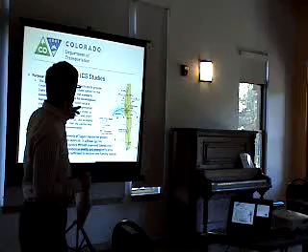You can see the purpose up there. I won't read all of it, but I'll emphasize the italicized part: you'd only build a high-speed transit system if it delivers social, environmental, and economic benefits that are greater than the cost of building it and operating it.

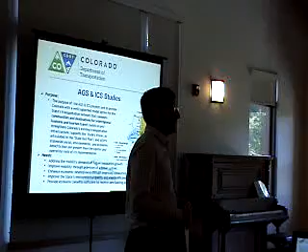The needs at the bottom are your good planning things. We're going to have growth, we need to have economic development, and we need to improve mobility and offer choices.

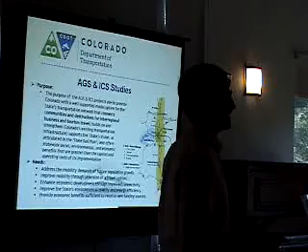So what does that mean to each of you? What are we talking about in terms of growth? By 2040, Colorado, today at 5 million people, will go to 8 million people. The Front Range alone will add 2 million people. The I-70 corridor between the west edge of Denver and Eagle County Regional Airport will add almost 250,000 permanent residents. So when we talk about what the state might look like, those are the kinds of things we have to look for to provide a transportation system that takes us into the future.

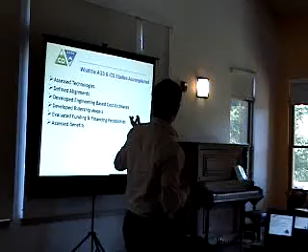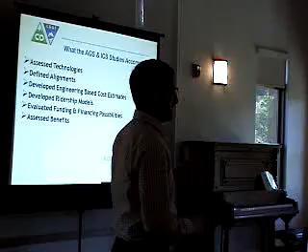What did the two studies look at? We looked at a lot of technologies, a lot of alignments, and developed engineering-based cost estimates. As the Rocky Mountain Rail Authority study had done, we took it one step further and costed things out on a per-mile basis, whether on structure, on grade, or below grade, to that level of detail so we have better confidence in the cost.

We confirmed the findings that Diane mentioned, that the two systems have to work together. If you do one or the other by itself, the benefits just aren't as great. And then we evaluated funding and financing possibilities, which I'll leave for us to discuss a little bit more later. Bottom line: the benefits outweighed the costs.

High-speed transit delivers more choice for people making longer distance trips. Speed makes a huge difference.

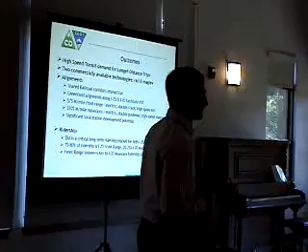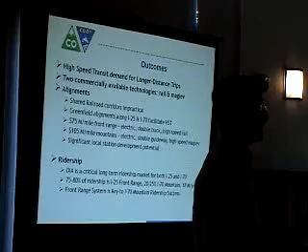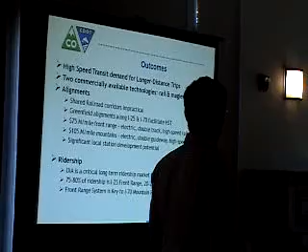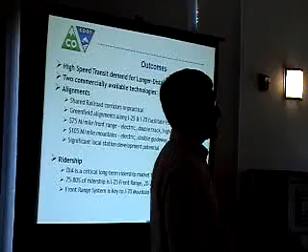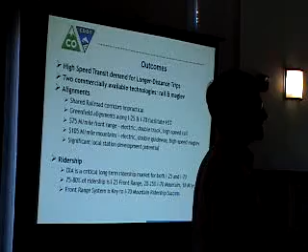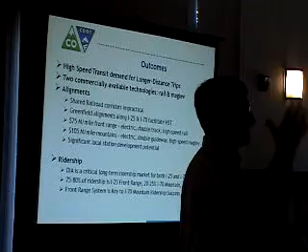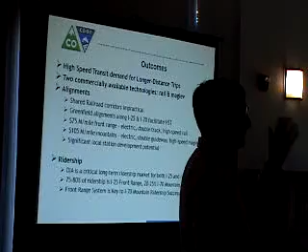Alignment-wise, folks say, why don't you just buy some used train stock and throw it on the existing tracks? Colorado, compared to many other parts of the country where you hear those kinds of stories, just doesn't have the infrastructure. Our freight railroads are maxed out, particularly with the growth of oil and gas development on the Front Range and up in this area, there isn't any spare capacity. There's not abandoned railroads like you find in the upper Midwest and over to New England where industry has left a lot of choices for a lot of people.

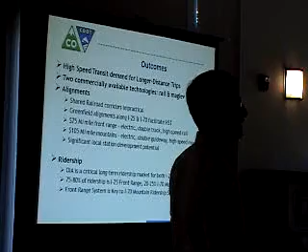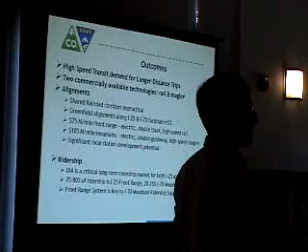Cost-wise, the numbers are big. They might look staggering, but when you look at the cost of building interstate highways and expanding those in urban areas, or expanding them along the I-70 corridor, the costs are nearly identical.

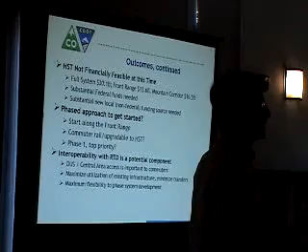I can touch on ridership, but I'm going to keep us moving along here. High-speed transit with current funding sources is not feasible without some new funding source. You saw the cost on the previous slide. Substantial federal funds will be needed to make this work, and non-federal sources are also needed to provide the match to the federal funds.

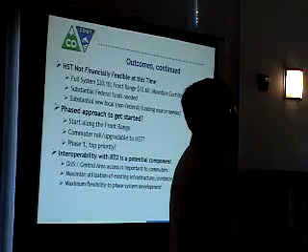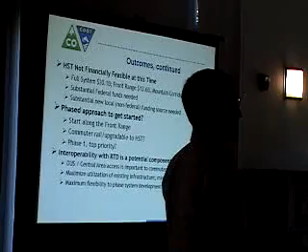High-speed transit is no different from our roadway system. It's about what we all as Coloradans want to do for our economic development engine. What's going to make our state economy move forward? That's the choice and discussion we need to have: where do we best put our transportation dollar to move our economy forward?

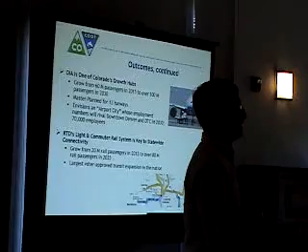Interoperability with RTD is important from the perspective of the federal folks. We don't want to create a competitive system to RTD and make RTD less effective, or have the billions that have been spent on the urban system be underutilized.

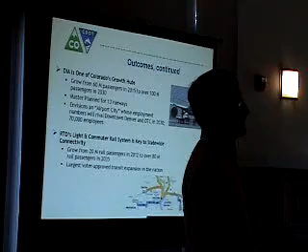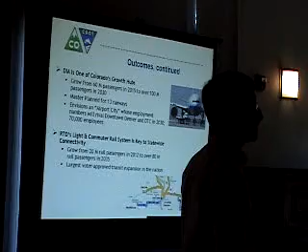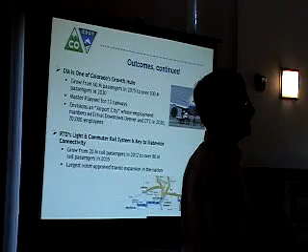So when we look at interconnectivity and what that means to all of us: DIA has 60 million passengers today running through it. By 2030 it'll have 100 million passengers. It currently has 6 runways, but it's master planned and environmentally cleared for 12 runways, so it could more than double in size compared to today. It's one of the few airports in the entire country that has that story. So Colorado is poised for growth.

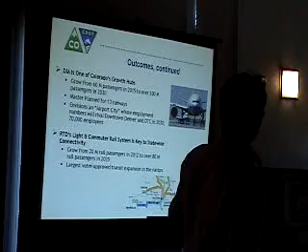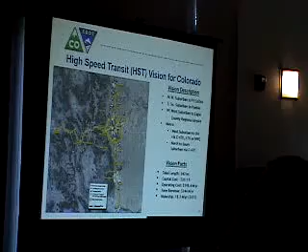RTD itself has 20 million light rail riders today, and will have 80 million light and commuter rail riders by 2035. So when you talk about connecting the system together, you're tapping all of those markets, providing the ability of people to have different choices and move across different systems.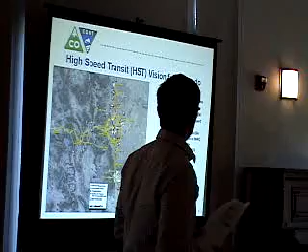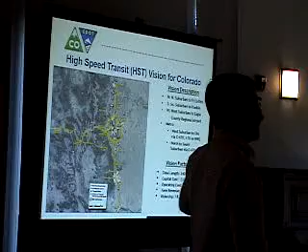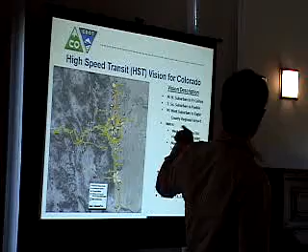So here's the vision that came out of the 2 studies. North-south, about 180 miles; east-west, about 160 miles. You'll see some dashed lines there. Moving north-south, if you were to build infrastructure, the airport, per the previous slide, is a very major market. From the I-70 corridor, the preference is to move straight across the Denver metro area, the dashed blue line there, so you don't have a transfer going to the airport.

Additional work needs to be done to figure out how the connections work to get to Union Station. It's very cost prohibitive to easily get a high-speed system to Union Station, but you can get awfully close.

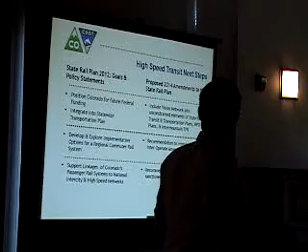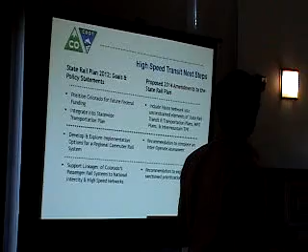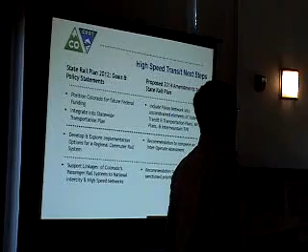In 2012, CDOT did a statewide rail study, and on the left side were the policy statements that said we ought to go after money, develop ideas further, and support linkages. With the completion of these 2 studies, you'll see in regional and statewide plans mentions of both studies, and we will complete some additional studies to answer the Union Station question. I think I'll leave it at that.